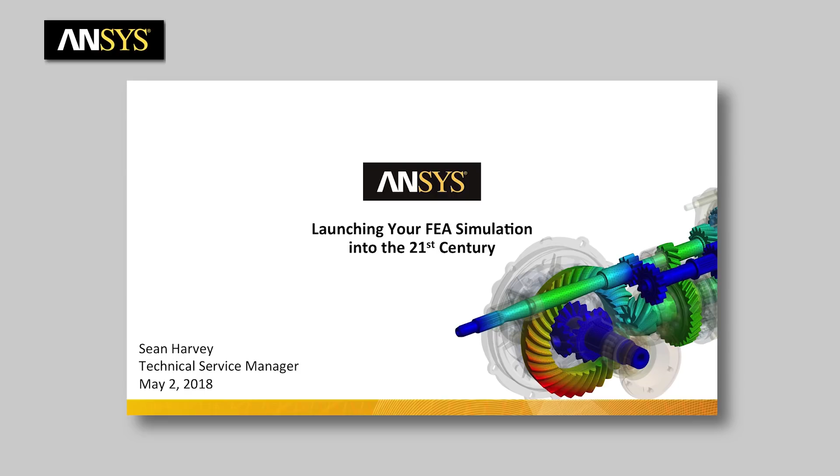So again, my name is Sean Harvey. I'm a Technical Service Manager at Ansys, and it's my pleasure to be here. I've also been using Ansys for 27 years, so I've really enjoyed the ride. And the most spectacular thing is to see where our technology has really come.

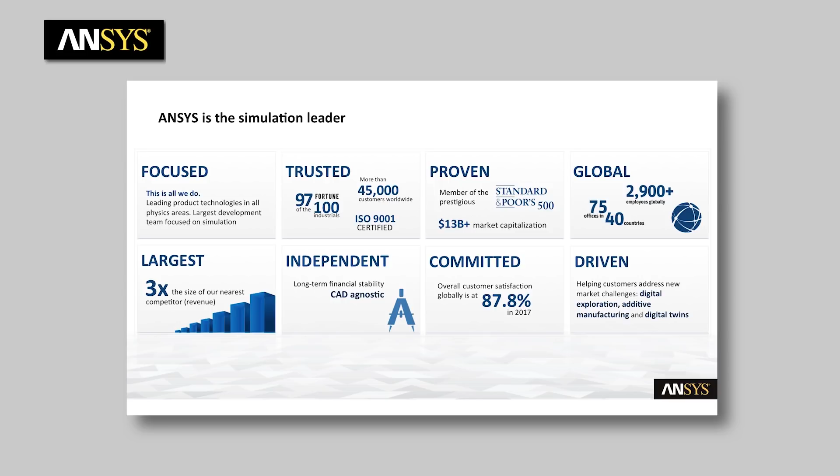So I'm not going to spend a lot of time on some of the corporate information. We're going to get into some 6 focal points about Ansys. I did just want to mention, Masha showed the slide up there, that Ansys is focused. This is what we do. We do simulation. We have really high customer satisfaction. We're the largest, right? Our revenue is 3 times that of the nearest competitor. So if you're not an Ansys customer and you happen to be in the room, Ansys is probably someone you might want to consider being a partner with.

Okay, so I put together these 6 bullet points. Why Ansys? Now I could think of a million reasons, but I focused on just 6 for this particular talk. Commitment to R&D, seamless workflow, multiphysics integrated platform, mapping external data. I know all of us work with other tools, and we all have to coexist and work together. So that's part of that discussion.

Unlimited control. So basically you saw Hari do a demonstration of our Ansys Workbench additive, right? And you can see that there was the ACT wizard shown in there. That gives us control to implement new things like additive very quickly into the Mechanical user interface. So we really give the control to the user, and I'll get into all of those. And then I'm particularly proud of being a manager on the tech support team: outstanding technical support.

So our commitment to R&D, if you take a look at this graph, it's pretty amazing. Masha showed the slide earlier that we're investing $200+ million in 2017. That's just an astounding amount of money going back in. You can see Ansys is financially very stable, a great company to be partnering with. In fact, we've acquired so many companies and worked with so many new technologies that the graph shows some of the companies, like ICEM on the meshing side, and CADOE, the one with the parameters and optimization. Then we've got CFX on computational fluid dynamics.

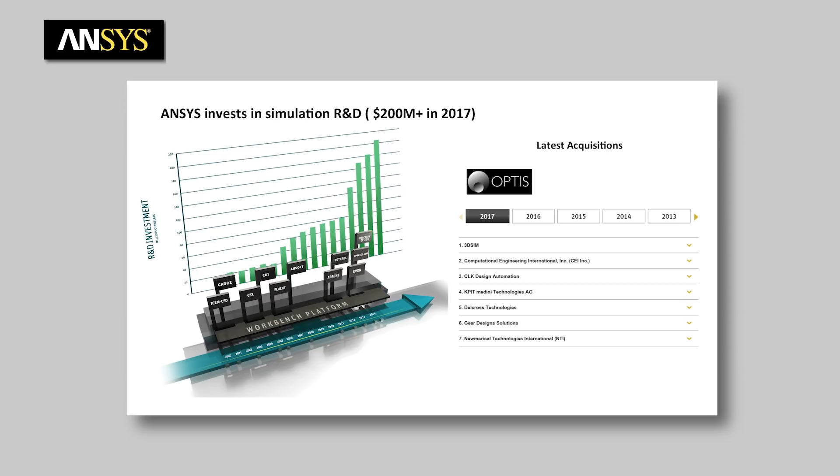Start working our way up the bottom of those flags in the tree. Electromagnetics we have in there, Apache for semiconductors, Esterel for embedded software, even for composites. You can see SpaceClaim, and then Reaction Design for combustion modeling. And some of the newer ones aren't even in that graph, with the latest one, 3DSIM, and even one that's in the news that Ansys is acquiring, Optis. So again, we're putting a ton of money, like 1/5 of our revenues, back into R&D. So Ansys is really committed to our technology.

Okay, so with that, I'll move on. The talk is going to be more structural focused. But if anyone is more interested in the other topics, when we have our open Q&A, we can try and field those as well. What I really wanted to point out in this slide is 48 years of technology in MAPDL. Masha showed that in 1970 Ansys was founded by John Swanson, and basically since that day, the code that you see on the right has been evolving for 48 years.

So for those who don't use Workbench Mechanical, you might be thinking, is this Mechanical a new solver? Those in the room who use it already know that behind the scenes, it is still running a code that's been in development for 48 years, and there's no plan of making that go away. You're really just using a user interface to access that.

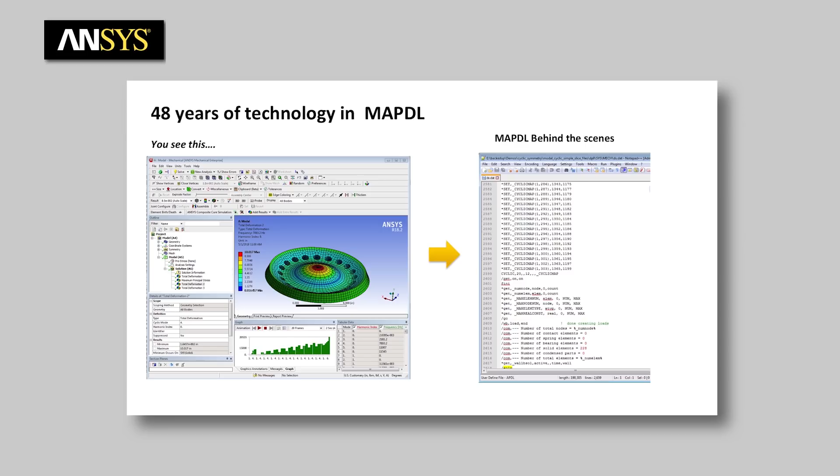Okay, so for some of you, like I said, this is old hat. But for those who don't know, when someone says, I want to use Mechanical, is that as good as the APDL solution? Well, pretty much they're the same solver. Of course, you get different flavors of answers depending on how you use the tool. Whether we use nodal averaging and all these things can be different, but it is still the same tool.

So once we write out that APDL file, people can use Mechanical and APDL however they want. You can go one way, which is just work in APDL from that point on. You used SpaceClaim to do your amazing CAD import and geometry cleanup, and you spit it out to an APDL file, and you want to work that way, fine.

Bring it back in later. We give you the control to work how you wish, and you can always go back.

I know a lot of people in aerospace who are traditionally used to text file inputs, especially those who do a lot of work in Nastran, where I spent 10 years with a lot of text file inputs. We just make it easier to do your pre, post, and solution in one environment, but still give you the control to use that.

So just to set the record straight, because I know there can be confusion, this really is the same solver behind the scenes.

Our meshing technology, I'd put in there as fast with complete control. I've taught a lot of Ansys Mechanical over the past decade to many people, and at first they think it just creates a TET mesh, or that they don't have the control they need. But if you drill down into it, we really do give a lot of control.

There are lots of meshing technologies behind the scenes. In this fan blade example in the top right, we use things like our ICEM technology for multi-zone meshing. There are some really great meshing technologies that have come over from our CFD acquisitions, and we've taken those and brought them into a common platform, Ansys Meshing, inside of Workbench.

We also do work with beams, shells, and tetrahedrons. That helicopter example is just a demonstration, but there are hundreds of parts, and using parallel meshing, it meshes in less than a minute.

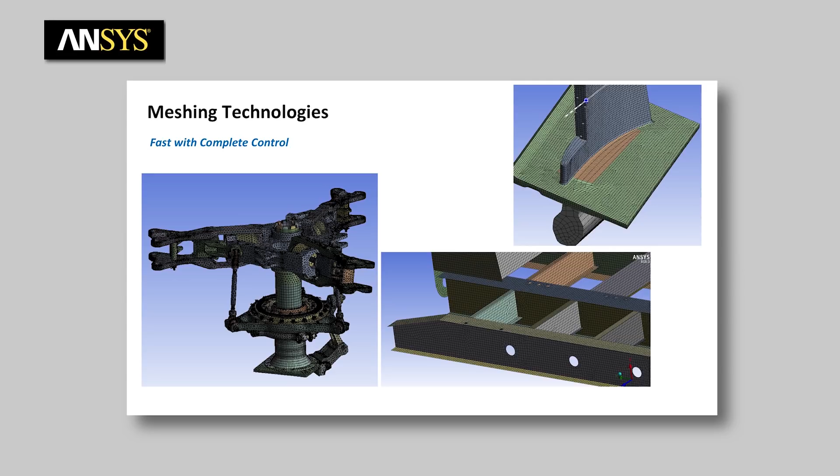So the talk is bringing your FEA into the 21st century, and many of you may say, well, I already know this—this is going to be broadcast to a larger audience. But I'll say to those who don't know: this platform really does give you the ability to innovate.

We're not creating one-and-done models where you make a mesh, and then someone makes a design change upstream, and now what do you do—you have to start all over because you've been working with a divorced mesh. Those in the field have to innovate very quickly, and I overwhelmingly hear how much they appreciate the ability to work in this type of environment.

Large model HPC performance: here's an engine block model with almost 3 million degrees of freedom. It has plasticity, gasket elements, and it's nonlinear.

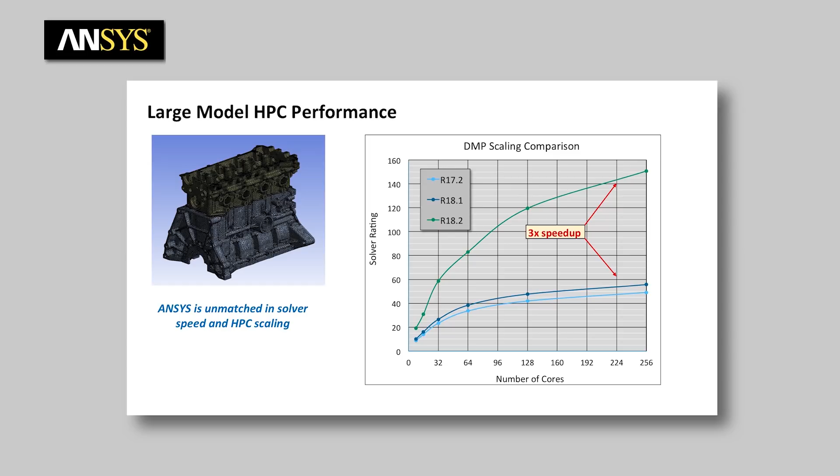If you look at what happened at 18.2, you can see a tremendous speed up in scalability as we add number of cores. One of the amazing things we've done is change the performance and capabilities of our contact to get this 3x speed up, which is pretty remarkable.

Historically, folks have said that mechanical FEA doesn't scale as well as CFD. But you can clearly see that, given the right amount of hardware, we can definitely achieve really good scalability.

The solver rating tells you basically how many times faster you'd be able to run that particular solution. Again, the first part of this talk is commitment to R&D—this is absolutely Ansys's commitment to making sure that every release, things run faster than before. And at 18.2, this was a big jump forward for this type of analysis.

Linear dynamics is a very important analysis, whether it's modal, harmonic, spectral, or PSD, and we often have very large models. What we have here is this blade row model.

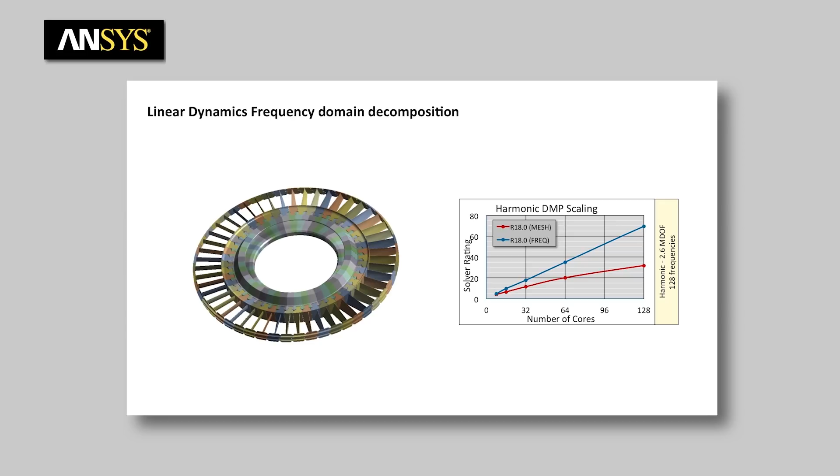Typically when we talk about meshing and HPC and solving with HPC, we're talking about domain decomposition—taking different pieces and throwing them at the computer. With this frequency-based decomposition, you can actually get near linear scaling, really good scalability, because you're throwing each frequency at the computer. Each compute node solves for one of the frequencies, and when it's done, it moves on to the next one. This works out really well because you get better load balancing.

You can see some of the benefits of using this type of frequency-based decomposition. As far as commitment to R&D in linear dynamics, Ansys is very serious about being on par with all the other linear dynamic solvers—this is just an indication of solving these big models using this new technology.

Composites in aerospace are often very important. Lightweighting means lots of structures have composites. That's my area of expertise. We've had composites technologies for decades.

When I said 27 years ago, I was using a layered Ansys solid element that is still in Ansys today. It's been in there, nothing brand new added, but what we have done over the past 7 or 8 years is made it much easier to build complex solid models.

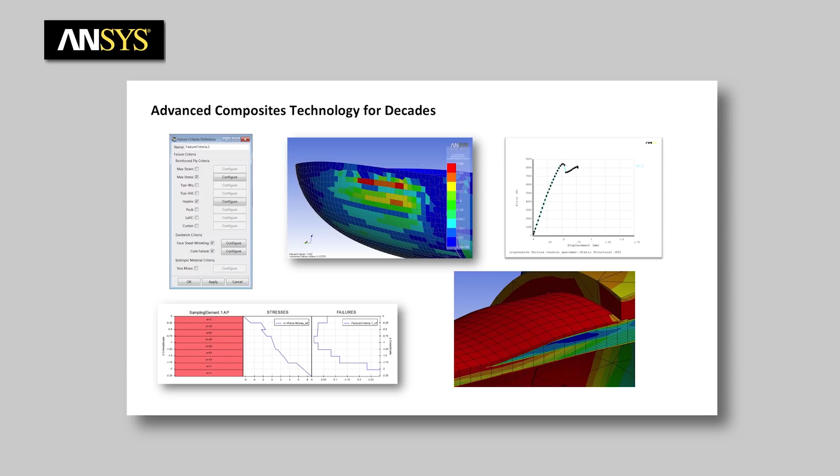I can drill down over here in the bottom left and look at your interlaminar stresses through the plies. We've got progressive ply failure, damage models, and your ply evaluations and failure evaluations are up there.

Ansys has had the composite technologies, and we continue to evolve them. Composites with fluid structure interaction.

In aerospace and defense, many structures involve radome covers, wings, or something in a flow field, or wind blades, or propulsion systems, which often need fluid structure interaction. We make it really easy to run our CFD solvers, Fluent and CFX, and pipe that information through Workbench, connecting the fluid flow into the setup.

In this model, this is a radome, and you can see the pressure contours on the radome, and the flow field of the aircraft below that. We make it really easy to take the CFD, the structural, and the composite analysis into one unified environment.

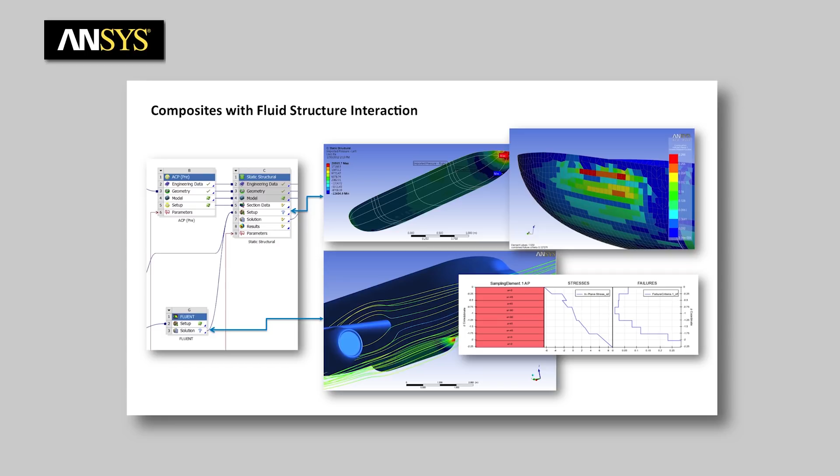If I go back upstream to the very top cell of that ACP and change the geometry, that will go downstream and change the fluid mesh and also the structural mesh. The time to innovate with Ansys and these types of tools is dramatically faster than using conventional tools.

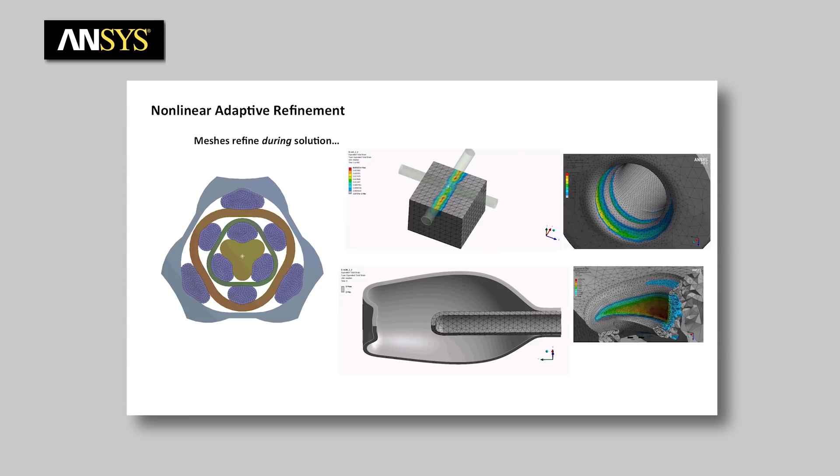Other areas where our commitment to R&D shows are adaptive refinement, being able to solve difficult, complex, nonlinear models. We get a lot of support calls about meshes becoming overly distorted during the solution, and how to solve this. Ansys has spent a lot of R&D effort to do stuff like you can see here on the screen.

Some examples: multi-body remeshing, like this torque drive device. These bars are cutting through material, like some manufacturing processes. This is a glass blowing example, really phenomenal - you wouldn't be able to do this without adaptive remeshing. That tetrahedral mesh is actually blowing out to fill the void.

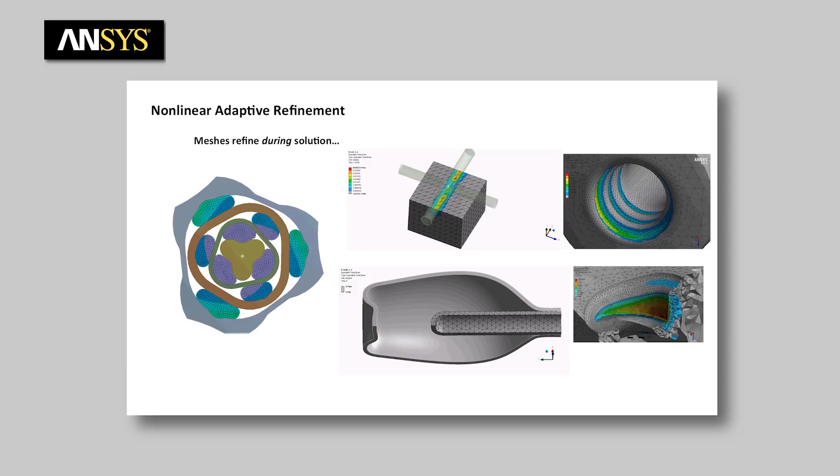These are all being done in our implicit MAPDL solver, there's no explicit solver involved. This is a threading operation, forming the threads through working the material. And this is a seal being pulled - you can see the evolution of the mesh and the evolution of the stresses and strains. This evolution has taken place over about 6-7 years of development time to get to this point.

Fluid structure interaction: in the previous case I was showing a one-way fluid structure interaction. This isn't new, but we make it easier inside the Ansys environment to couple CFD with the structure in a two-way environment. The heart valve example shows flow affecting the structure and the structure affecting the flow - you need what we call system coupling, where the two run in a synchronous solve.

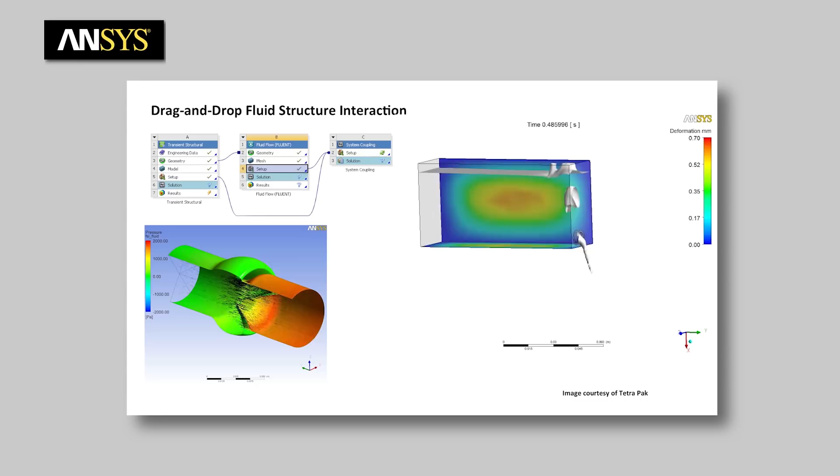That's a Tetra Pak, and that's its behavior. If you take a Tetra Pak or any carton and start pouring fluid out, as the pressure drops, air has to come back in, and you get an air bubble popping up and the container pops open again. Those are the types of simulations that are possible.

Okay, the next section here is on seamless workflow. Hari and Brent both touched upon SpaceClaim, and I'm not going to spend a lot of time on it, but our CAD connectivity, once we have SpaceClaim, lets us bring in models from any of the CAD tools, and pretty much everything under the sun, into SpaceClaim and down into our downstream tools. This has been overwhelmingly positive with our customer base.

So you can bring in pretty much anything, and then reverse engineer it. You can clean it up, modify it, put in holes, remove holes, do all kinds of changes before you go downstream to your FEA or CFD simulation. We have bidirectional support, and this is CAD neutral - Ansys works with all the flavors.

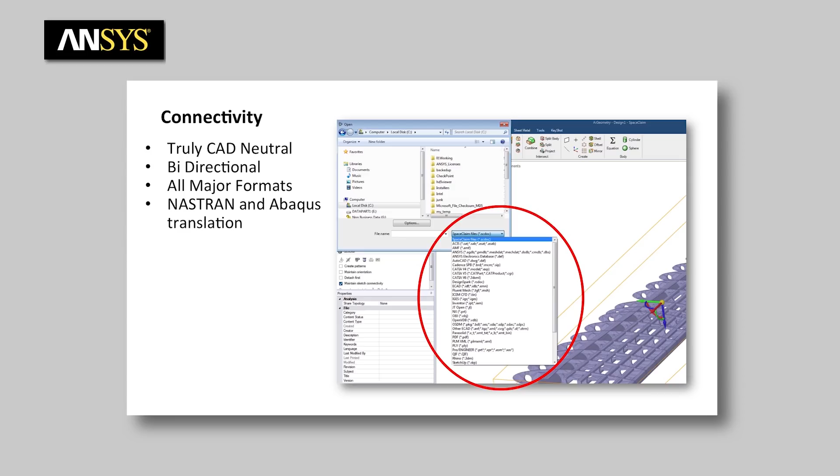Though it's not in this SpaceClaim interface, I did want to bring up, and we'll have a Q&A roundtable discussion on this, that we do bring in Nastran. So if you have legacy Nastran models that you want to bring in to do, say, FSI or something like that, we can bring in those types of models. We'll also be making it much easier shortly to export Nastran outside of mechanical, so you'll be able to take those Nastran models out of mechanical to integrate with other tools - like if you're in space and have to do a coupled loads analysis. We're going to have a solution for you guys for that.

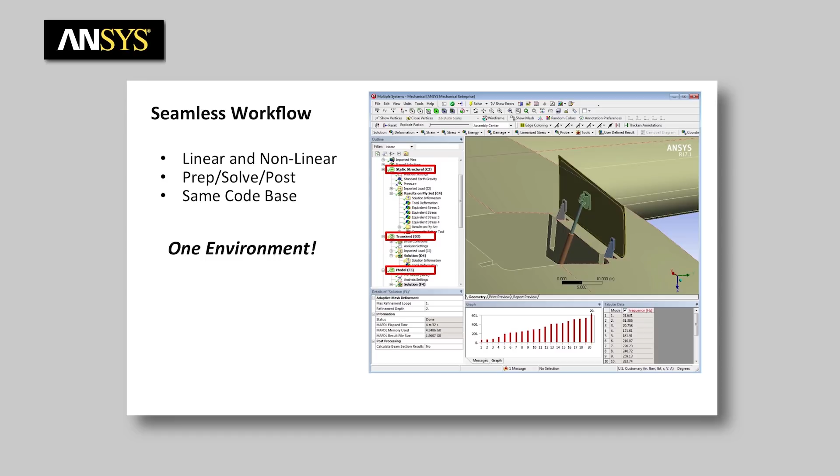Another thing to point out is, when we say seamless workflow, we're able to do linear and nonlinear, so you don't have to switch from implicit to explicit - everything is in this environment. Highlighting here in red, there's static, transient, modal, but everything structure-related ends up in mechanical. Whether it's our multi-body dynamics, rigid body dynamics solver, or explicit solver, they all have that common UI, making it really easy for someone unfamiliar with a new code to adapt to that new solution sequence.

So they don't have to learn new software - the workflow stays the same. They can be doing explicit, rigid body dynamics, transient, or harmonic PSD. It's all in the same environment.

Ansys is physics-based simulation, so from the structural mechanics standpoint we can do all kinds of things. We'll use this helicopter as an example. For multiphysics, you might have an electric motor, an electromechanical coupling, so being able to connect those two together, very common for electrification. Ansys is used extensively between the Maxwell and Ansys mechanical tool inside of Workbench.

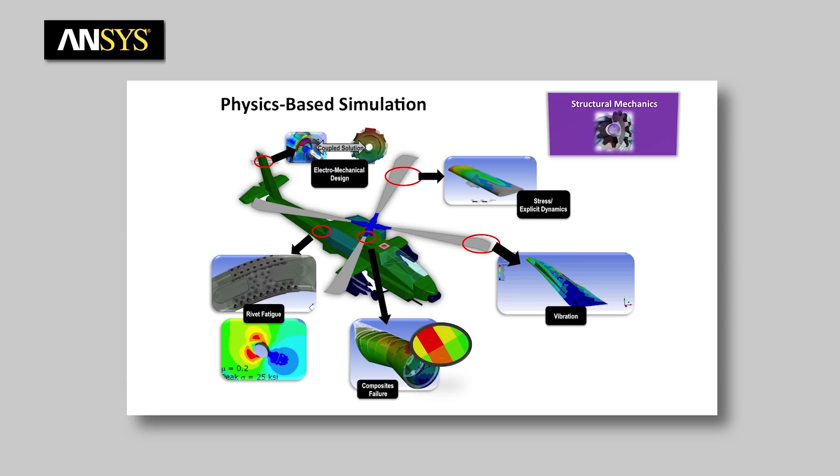We'll use it for, say, the blades, stress and explicit dynamics - here they have a bird strike, a bird impact, on explicit dynamics. Vibration, as I said before, could be transient, flutter, or harmonic analysis. Composite failure - here they're looking at things like rivet fatigue. This example paints a picture of multiphysics in an integrated environment.

And then from there, obviously, what would we do next? We solve for the conjugate heat transfer on the CFD and the mechanical, and then we'll solve for the thermal stress. Okay, so once we have the thermal stresses, another thing we'll do is, in aerospace, we often have all kinds of load conditions from crash loads, all the inertial loads, takeoff loads. So you can look at X number of Gs, vertical, lateral, fore and aft.

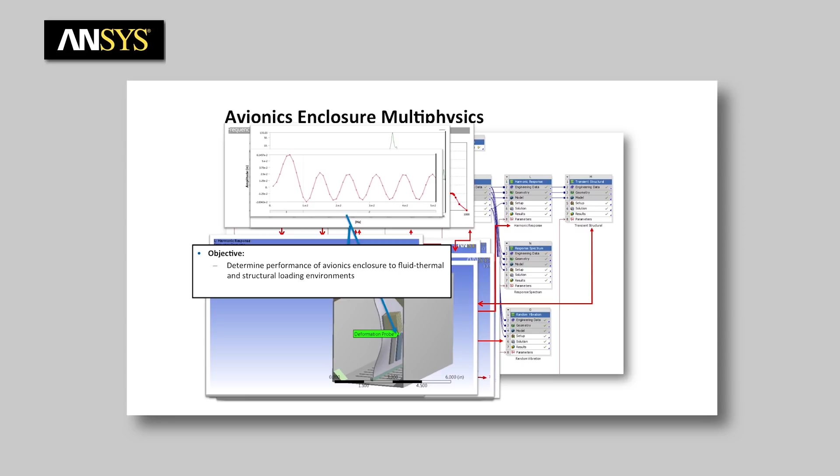So I'm looking at some of the deflections of the board. And then we'll look at our natural frequencies, the modal, and then I'll look into harmonic potentially. So, harmonic, if it's going to be sitting there, we're going to make sure we're not going to get the thing resonating at a periodic frequency of the rotor blade or whatever your excitation frequency is. So we'll be able to look at the harmonic, and things like transient structural. So if I want to do a very short burst impulse and see the response, being able to do impact and transient.

So what you can see from here, if I was now to go back to the beginning of the schematic and update my geometry, like, let's say I'm going to move the location of the board or something like that, all I have to do is hit the update button on the project, and then this conjugate heat transfer and Icepak will run, mechanical will run, all of these downstream simulations will run. Okay. So that gives us the idea of how to do that type of example.

So this is CAD from any of our CAD tools, right? If folks haven't seen this, that in itself is a pretty awesome feature for those of us who often have to work with CAD from other people. As an analyst, we want to go ahead and make the changes, and not have to go back and ask that guy. We can go in and make these types of changes.

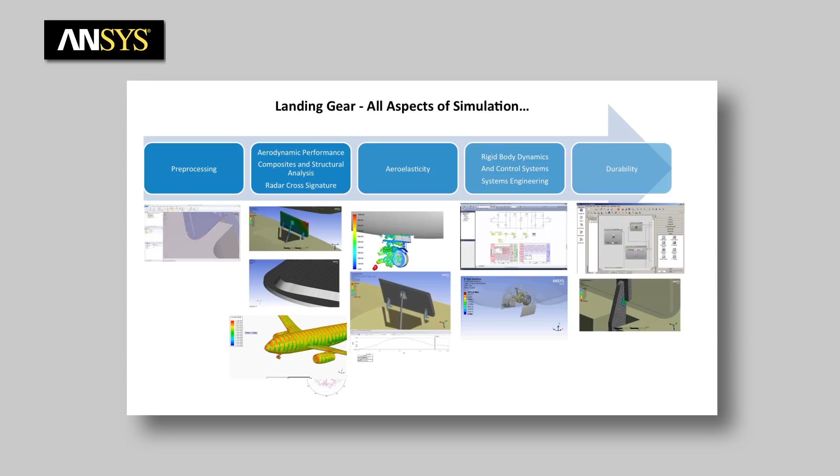And at the back end of this, I've taken it out to the durability. So predicting the life and lifing on the part. Now you could go one step further in this demonstration. I don't have it shown, but you could do things like, what is the digital twin? So predicting in-service life of a part is something that's available.

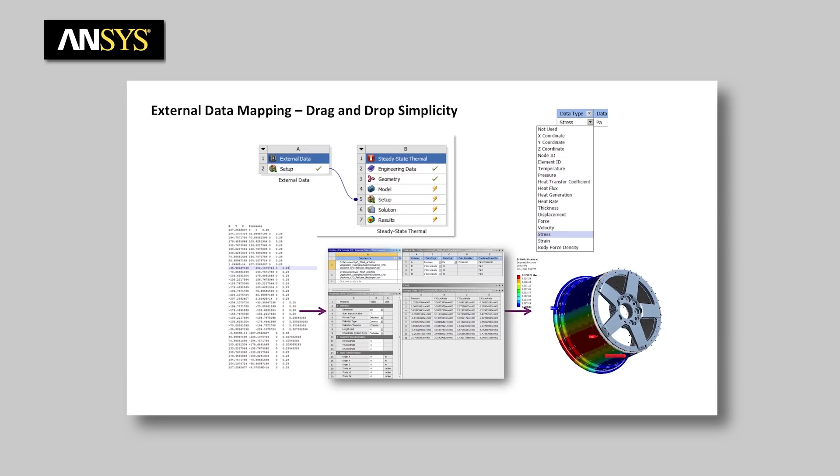Okay, another thing that's really important, and I don't want to underemphasize this, because on support we see lots of people trying to get data into Ansys, and many of them still don't know. So if there's anyone in the audience who hasn't seen this, it's pretty eye-opening. We really make it easy to get data in and out from whatever tool you're using. And we've really expanded the way that you can bring this data in. So you shouldn't have to struggle to bring in data from other solvers.

So in the top right, you can see the many data types, from temperature and pressure and heat transfer coefficient and heat flux, heat generation. We've added in things like initial stress, initial strain.

The point being is that Ansys is pretty open to take in whatever you have from your other runs. So if you have initial stresses and strains, or you have temperatures, or you have in-house codes, getting that into Ansys to be able to do downstream simulations is just using this thing called external data. So external data uses a spatial mapping of your results, and it does a mapping onto your part.

So you can see here in the bottom right a preview. So after you bring in that data, you can then preview it on your model and say, OK, how is that mapping? And there's a whole slew of mapping options, and how that data gets mapped and validated so you can actually see what is the best mapping I'm going to use for my particular simulation.

So again, I know in an ideal world, everyone's going to use Ansys for the CFD, the EMAG. But in the real world, oftentimes you have to use another tool, obviously. And external data is a phenomenal capability to be able to get that data into Ansys Mechanical, make it really easy. So most of the time it's a CSV file. You can go ahead and bring this in.

I see people still on support writing scripts to bring in data from third party, and then you show them this and they're like, wow, I had no idea Ansys had that capability. So it makes it really nice to be able to bring in that data.

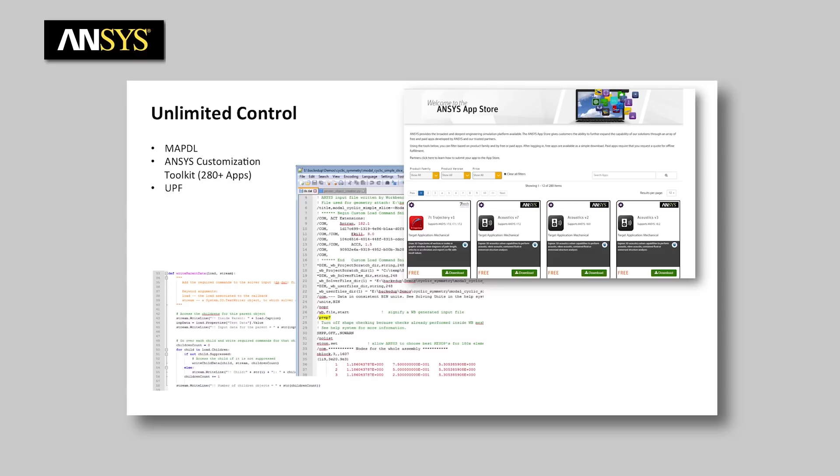Okay, the next section on unlimited control, it really shows the amount of support that's going behind Ansys right now. So if anyone in the room hasn't been to our Ansys App Store, whether you're an Ansys user or not, I encourage you to do so because this was just started a little while back, and already we have 280 apps that have been created.

Now, an app can be anything as simple as I want to simplify the type of structural analysis I do on a day-to-day basis, or incorporate a feature that hasn't been incorporated. For example, what Hari was showing with the 3D printing is using our Ansys Customization Toolkit, or ACT, to enable you to control Mechanical and change the user interface, put in wizards, be able to control things like that.

So if there's a process that you're doing at your company that other people have to replicate, you can use the ACT. But you can also go to the store and look through the 280 to see if someone hasn't already done it for you. And the list is pretty impressive, what people have put up there. Okay. In addition to that, you have the ability to use other people's apps. You can create your own through ACT, so you can extend it very easily.

And remember, you always have control with APDL. I didn't really get into it, but anything in Mechanical that you want to introduce as APDL, you can put in command objects and go ahead and add to it.

Okay, so the last part here is on technical support. So I think this is important because I know our tools, as easy as they are to use, on a daily basis we get lots of calls. And a lot of those calls are just, what's the best way to go about doing this? And we're there to help you.

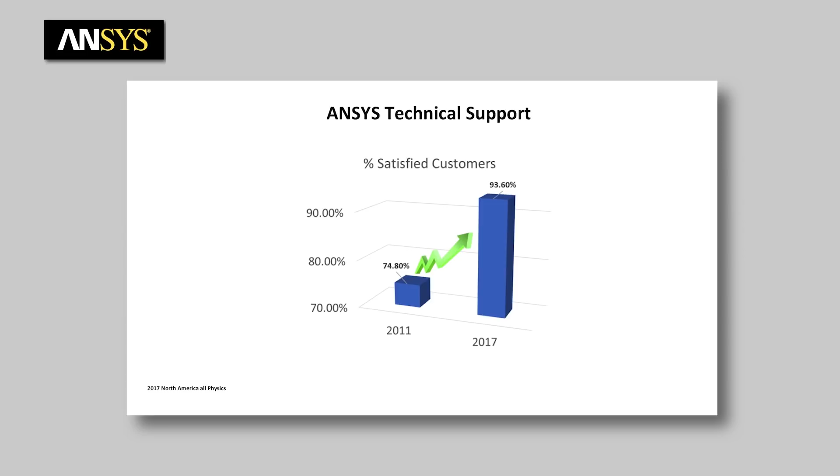If you take a look at this graph, since 2011, because of the drive for making customer support a business driver in Ansys, because we know this affects you and your use of the tool, you can see that we've invested a lot to bring our Ansys percent satisfied customers up to about 94% in North America. I can tell you hands down from hearing from all the people that we talk to, this is very important to them. I see every customer satisfaction survey that comes in.

And what I'm hearing from the field is that our competitors are not taking customer satisfaction as seriously as Ansys is. So when you're working with Ansys, please know that you have a really big team of people. In North America, we have over 60 people on a daily basis covering mechanical, fluids, electromagnetics, and systems installation. So we've got 60 people right now there to help. And again, as much as the software is a great product, customer satisfaction and getting help when you need it is what tech support is there for.